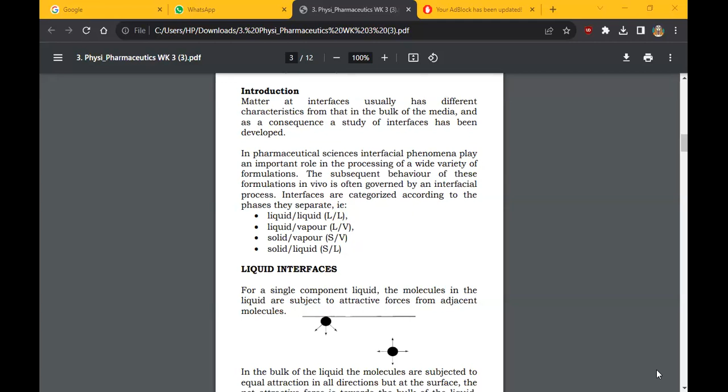For a single component liquid, that means a liquid which has one major component, the molecules are subject to attractive forces from adjacent molecules. Let me use water as an example. Water is a single component liquid, so the molecules within water are subjected to attractive forces from the molecules next to each other.

In the bulk of the liquid, the molecules are subjected to equal attraction in all directions. This is what I mean. But at the surface, which is over here, the net attractive force is inward. This net inward attraction reduces the number of molecules at the surface. So within the bulk the forces will be equal, but at the surface the attractive forces go downwards.

This results in different characteristics at the surface from the bulk, which gives rise to surface tension and surface free energy. Equal forces in the bulk keep the molecules at equal distances, while at the surface the forces move the water molecules downwards. That's what gives rise to surface tension.

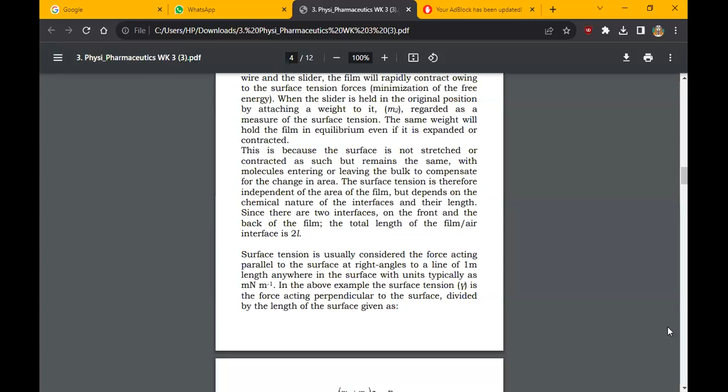Surface tension is usually considered as the force acting parallel to the surface at right angles to a line of 1 meter length anywhere in the surface. This is a very long definition. I think it's MCQs, so I'm not sure I want to focus on definitions.

In the example given above, the surface tension is annotated by this strange looking Y. So it's the force acting perpendicular to the surface. Perpendicular, from primary school we know it's 90 degrees. So the formula is this one.

So I went to the internet. Let me give you first the definition I found for surface tension on the internet. Surface tension is the property of the surface of a liquid that allows it to resist an external change due to the cohesive nature of its molecules.

So basically, let's go back to water. Water has cohesive molecules. So the stronger the cohesive molecules of water are, the more it can resist external change, which means the surface can't be broken easily. Ideally, that's what surface tension means. Like the surface of the liquid doesn't allow it to be moved or to go inward, to contract or expand, because the molecules within the bulk are stronger.

So ideally, the primary formula I'm getting for surface tension on the internet was Y equals F over 2L. F is the force, obviously, and 2L is what I've given as the length of the two interfaces. So this is also shown in this formula.

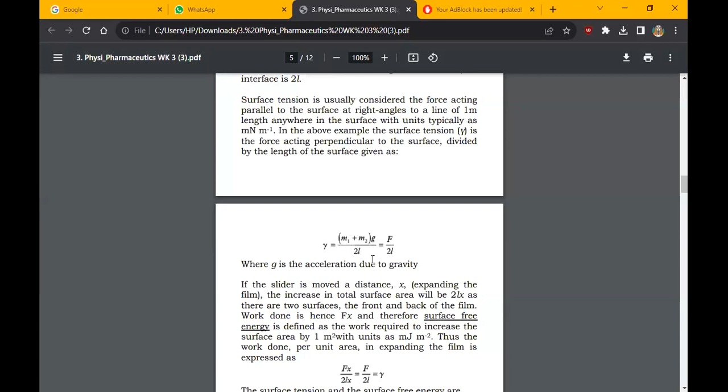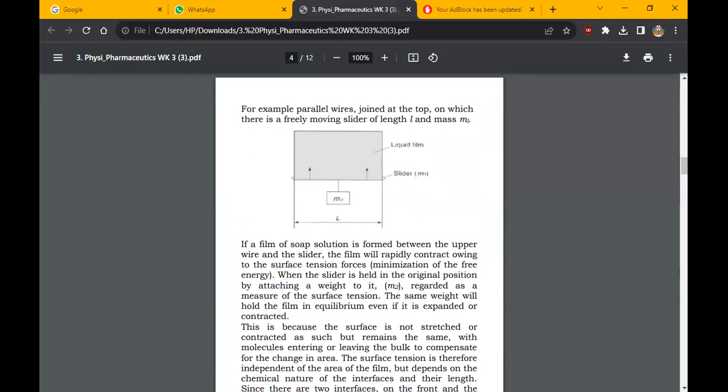So per the diagram above, there's mass 1, which is the slider itself. It has its own weight, which exerts a force. Then mass 2 is the weight that is put on the slider to keep it stationary, so that it doesn't expand or contract. And then into brackets, G over 2L, where 2L is the length of the two interfaces.

So surface tension, if you are calculating using that diagram, you're going to input this: surface tension equals mass 1 plus mass 2, multiplied by G, in grams, over 2L, which is also equal to F over 2L. So if in a formula you're given different values, you're able to equate it to this formula.

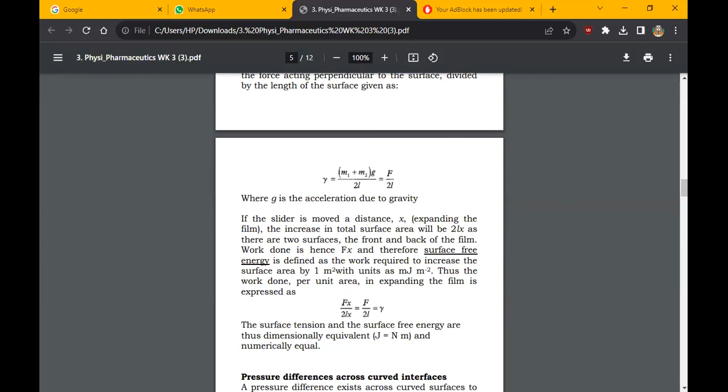So G is the acceleration due to gravity. I don't know the acceleration due to gravity value right now. Can anyone remind me? Was it 9.8? I'm not sure. If anyone knows, you can inform us or write in the chat.

So if the slider is moved a distance of X, expanding the film, the increase in total surface area will be 2Lx, as there are two surfaces, the front and the back of the film. This is just me explaining why there is 2L.

Work done is hence Fx, and therefore surface free energy is defined as the work required to increase the surface area by 1 meter squared, with its unit. It's such a long explanation, I don't think it's important, but yeah.

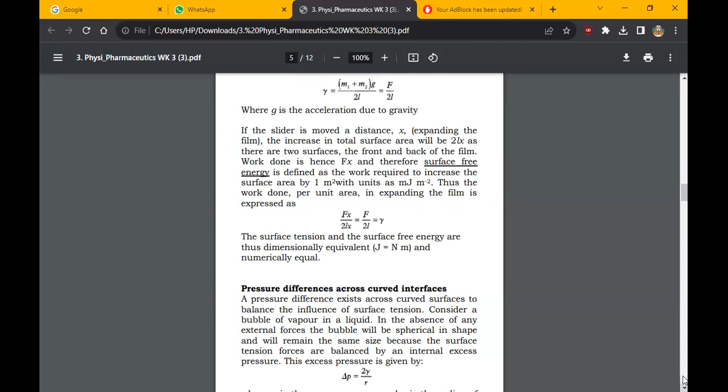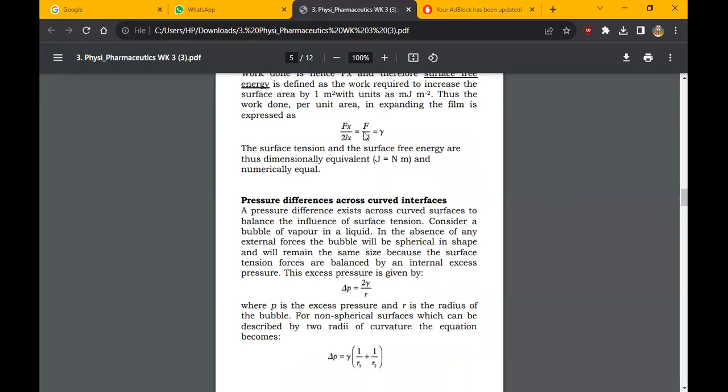I think that formula is just trying to equate surface tension and surface free energy, that whole big explanation. Because ideally F is the force exerted, 2L is the length between the two interfaces. So if the work done is defined by X, you multiply the original formula, surface tension equals F over 2L, by X over X. So you have Fx over 2Lx equals F over 2L, which is also equal to the surface tension.

So this is the surface free energy, and this is the surface tension. Per this formula, it shows they are dimensionally equivalent, which means they'll probably be equal. They should be equal when you do your calculations. So yeah.

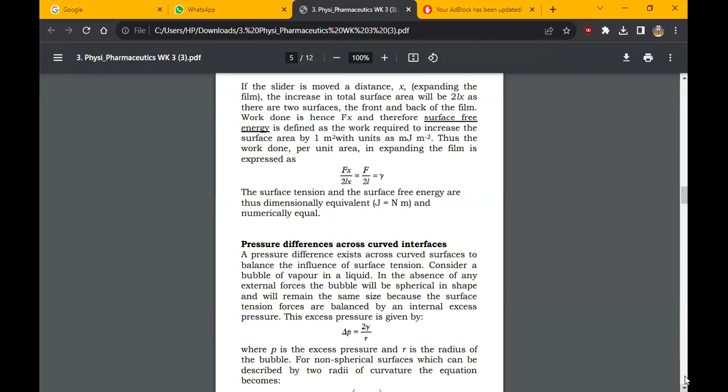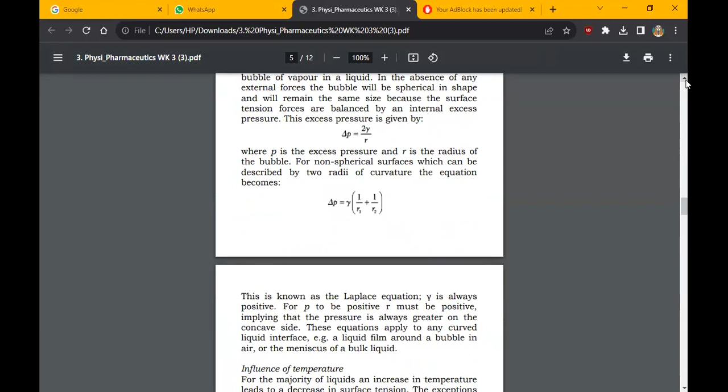So thereafter, let me take you to pressure difference across curved interfaces.

A pressure difference exists across curved surfaces to balance the influence of surface tension. Consider a bubble of vapor in a liquid, like a soap bubble, which should be spherical in shape. That's how it is normally when there's no force exerted from the top, bottom, or sides, so the bubble remains spherical and the same size because the surface tension forces are balanced by internal excess pressure. The formula for the excess pressure is change in P equals 2 times surface tension over R, where R is the radius of the bubble, since it's a sphere. That's for a spherical surface.

Are you getting this, guys? Are you with me?

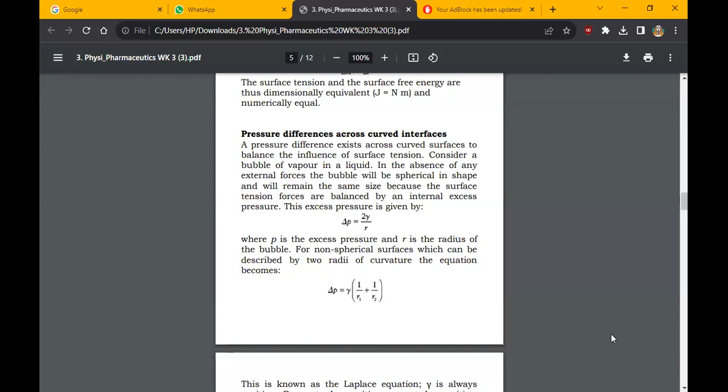Okay, so if you have a non-spherical surface, it's described by two radii of curvature. The equation becomes change in pressure equals surface tension times the bracket of 1 over R1 plus 1 over R2. So non-spherical surfaces usually have two radii, and both radii influence the excess pressure, which is why they're both included in the formula. This is known as the Laplace equation.

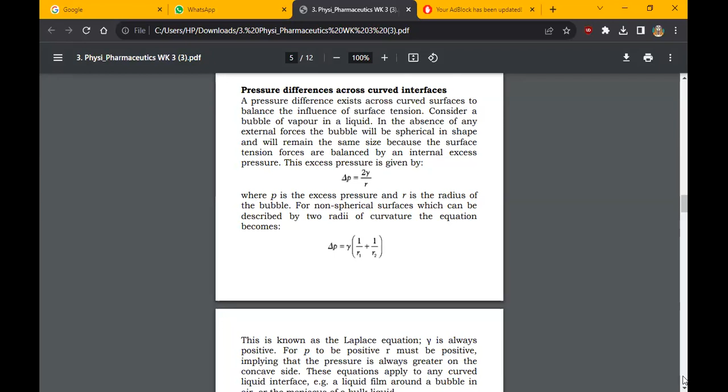That definition was rather long, so I researched something called the Laplace law. It states that the pressure inside an inflated elastic container with a curved surface, for example a bubble, is inversely proportional to the radius, as long as the surface tension is presumed to change only a little. So for your bubble, the pressure inside is inversely proportional to the radius, which is why the formula has 1 over R1 plus 1 over R2, assuming the change in pressure comes with a change in surface tension. That is the Laplace law.

Unfortunately, you just have to memorize it like that: the pressure inside a container with a curved surface, for example a bubble, is inversely proportional to the radius, as long as we presume the surface tension is changing a little. Even that last part you don't have to memorize — you can just remember that the pressure inside the bubble is inversely proportional to the radius.

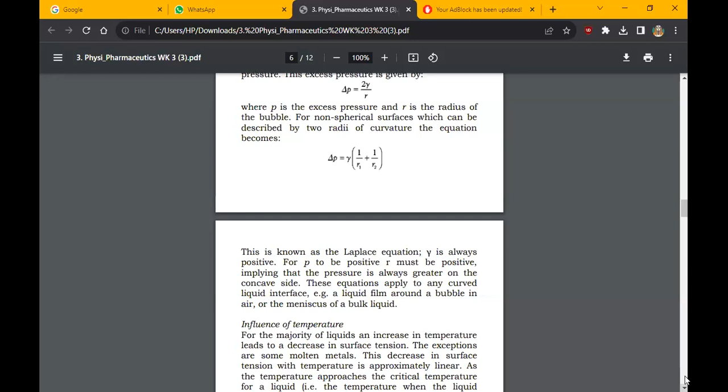After that, there's the influence of temperature on surface tension. For many liquids, an increase in temperature leads to a decrease in surface tension, and this decrease with temperature is approximately linear. So if you had a graph with an x-axis and y-axis, the line would move diagonally — a straight line, not a curve. As the temperature approaches the critical temperature for a liquid, the intermolecular cohesion forces approach zero.

I thought about this like Brownian motion — when you heat a liquid, the molecules within it move a lot more. When they move so much, the cohesion forces between the molecules are being broken down, and the molecules move about a lot. That means there's a decrease in surface tension, since surface tension depends on the cohesive forces inside the bulk as well as the forces at the surface. So if you're disturbing the bulk and the cohesive forces, the surface tension is also affected.

Think of a balloon: inside it there are molecules, and the bulk inside the balloon is air. Assume surface tension acts on the surface of the balloon, like the plastic holding the air inside. When you heat the balloon, the molecules move faster and faster, affecting the cohesive forces, and eventually the balloon bursts — meaning the surface tension has been greatly reduced.

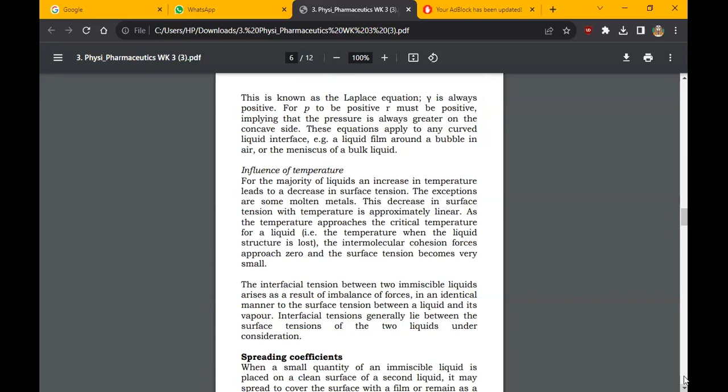So the only exceptions to this are some molten metals. I did not have time to search for such molecules.

The interfacial tension between two immiscible liquids arises as a result of imbalance of forces, in an identical manner to the surface tension between a liquid and its vapor. Interfacial tensions generally lie between the surface tensions of the two liquids under consideration.

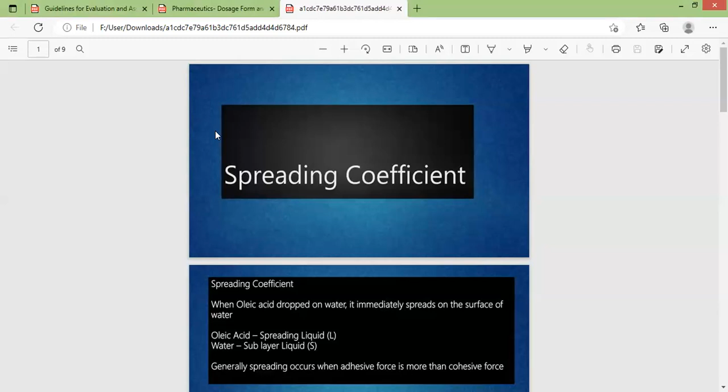Okay, sorry for the background noise. I don't know what is being built in my background.

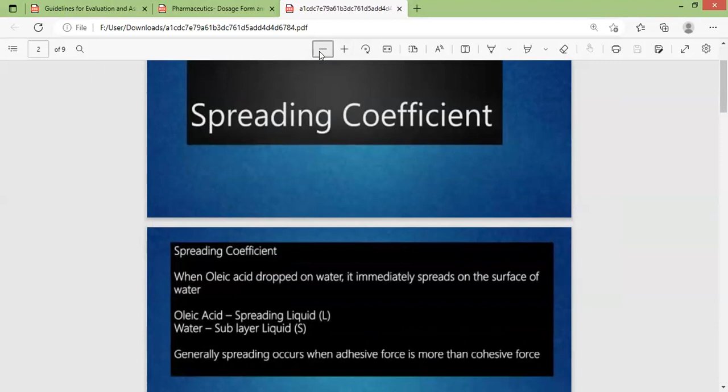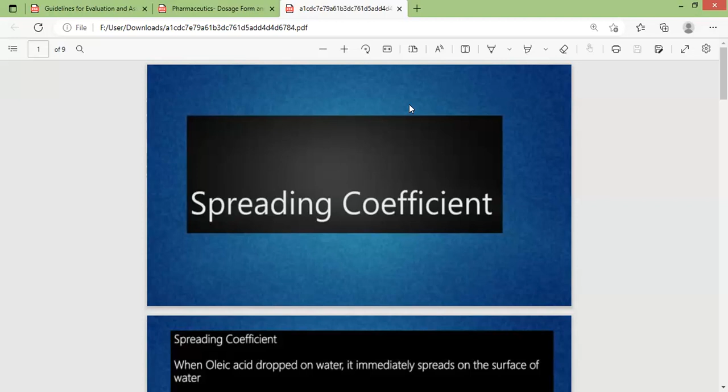So let me start by defining for you guys spreading coefficient. Basically, spreading coefficient is the measure of the wetting behavior. I'm just reading to you guys the simple definition I found: spreading coefficient is the measure of the wetting behavior of a liquid on a solid surface. So if you have a liquid which you pour onto a solid surface, how much the liquid wets the surface is the spreading coefficient. Another explanation is that the spreading coefficient is the difference between the interfacial free energy of a liquid-solid interface and the sum of the interfacial free energies of the liquid-vapor and solid-vapor interfaces.

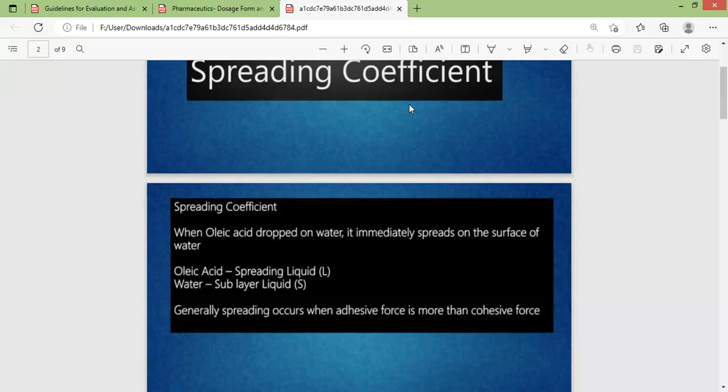From this slide share, I found it easy. So when oleic acid is dropped in water, it immediately spreads on the surface of the water. So the spreading liquid is oleic acid, and the water is the sublayer liquid, the liquid among which the oleic acid is going to have a spreading coefficient. Generally, spreading will occur when adhesive forces are more than the cohesive forces.

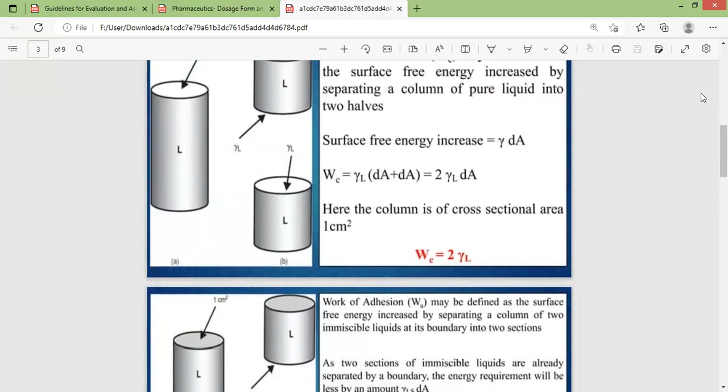From your basic science, just scroll down. Cohesive forces are the forces which are within the liquid. Adhesive forces are the forces between the liquid and the surface which it is being spread on, so adhesive forces are the forces between two different molecules. Cohesive forces, going back to the example of water - water to water molecules have cohesive forces. So cohesive forces are the forces that bring similar molecules together.

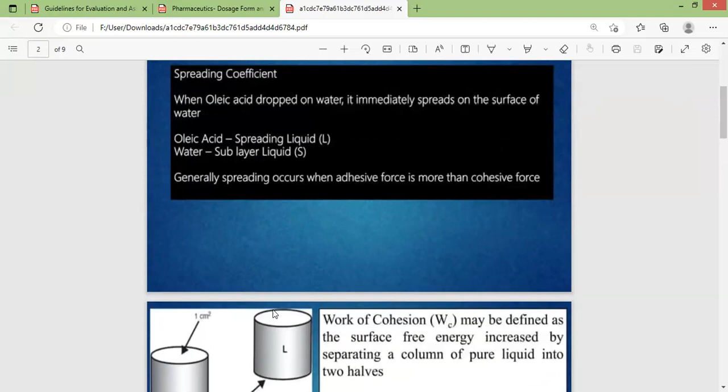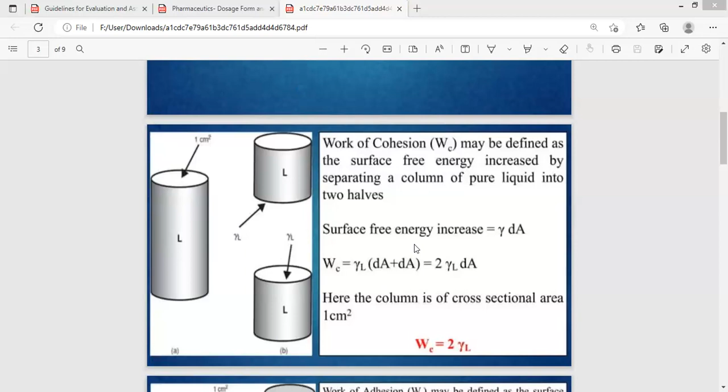Explaining it in physical pharmaceutics is a bit difficult, but I will try. So let's assume this liquid column here is the water or oleic acid. Work of cohesion may be defined as the surface free energy increase by separating a column of pure liquid into two halves. So the pure liquid, let's say, is the oleic acid - if you separate it into two halves, that is the work of cohesion.

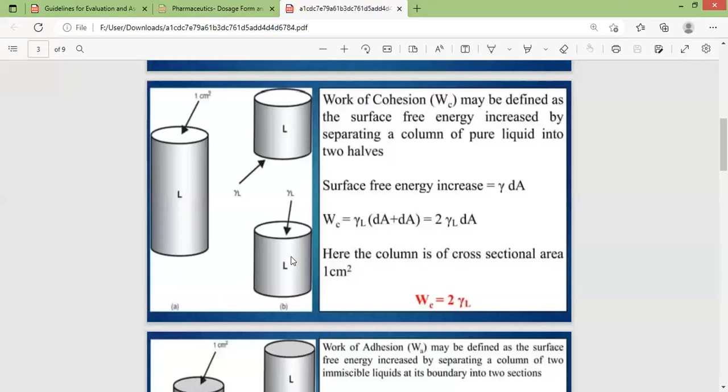Now scroll down so I can explain the work of adhesion. The work of adhesion may be defined as the surface free energy increase by separating a column of two immiscible liquids at its boundary into two sections. So the oleic acid, when spread into water - let's assume L is the oleic acid, S is water, and they're immiscible - when you separate them, that is the work of adhesion. So the first immiscible liquid will be the oleic acid, which is the L at the top, and then the S would be the water. That is the basic definition of the work of adhesion and the work of cohesion.

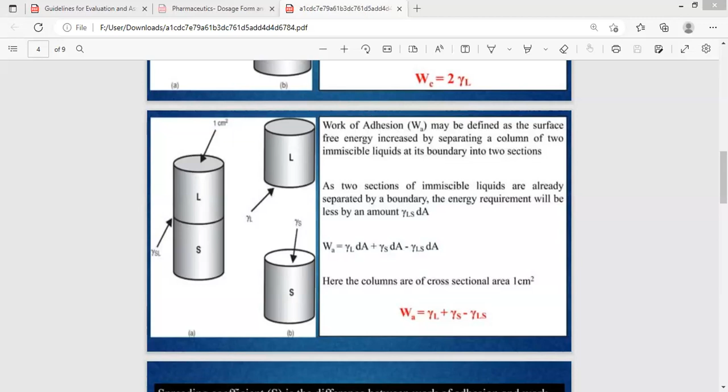So where the work of adhesion is stronger than the work of cohesion is where you're going to have the spreading coefficient.

So the spreading coefficient is the difference between work of adhesion and work of cohesion. And this long formula is what explains that. So work of adhesion, WA, minus work of cohesion, WC, is equal to surface tension L plus

surface tension S minus γLS, where L would be the oleic acid, S would be the water, and γLS will be the interfacial tension between the oleic acid and the water, minus 2 surface tension L, because again, there's two interfaces. It's such a long formula, but it's written over there. It's simplified. So what I was saying, keep scrolling.

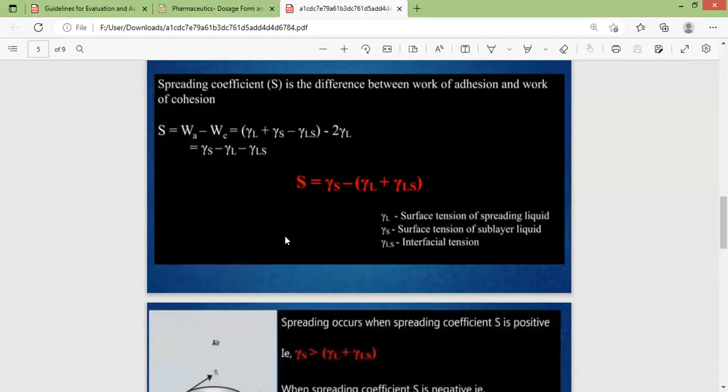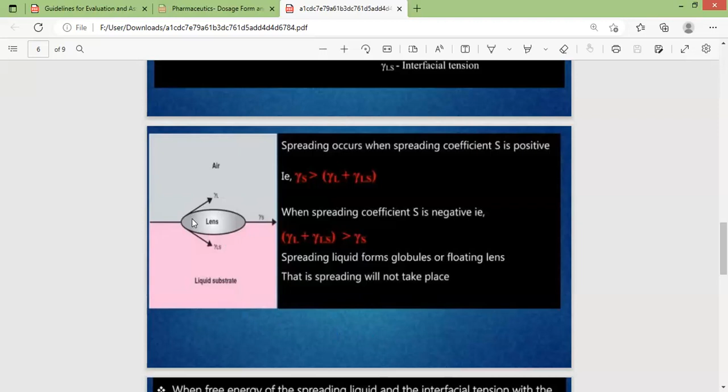The spreading occurs when the spreading coefficient S is positive. Where the spreading coefficient is negative, it means the spreading liquid will form globules or floating lenses. This means the liquid, in this case the oleic acid, which we put on top of the water, the cohesive forces were stronger than the adhesive forces, which means the spheres were not interrupted, so they settle on top of the liquid. Like now you'll see the bubbles forming because its integrity has not been affected.

But where the coefficient is positive, it means the adhesive forces overpowered the cohesive forces, which means they will mix a little bit. Okay, then scroll some more.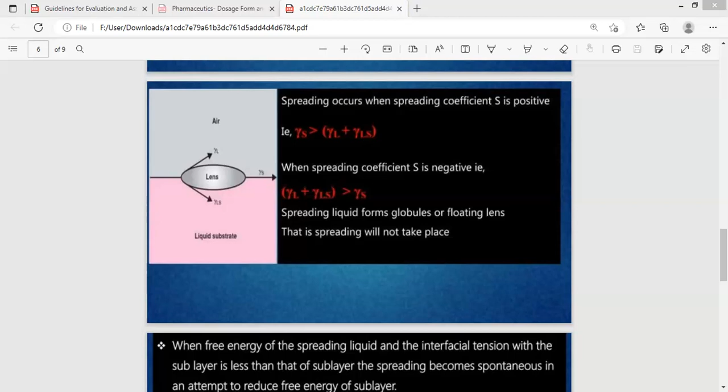When free energy of the spreading liquid and the interfacial tension with the sublayer is less than that of the sublayer, the spreading becomes spontaneous in an attempt to reduce the free energy of the sublayer. There may be saturation of the liquid with the other, and there may be change in the surface tension of the sublayer liquid. So basically, if, for example, you spread the oleic acid over the water, if at first the adhesive forces overpower the cohesive forces, then there's gonna be spreading, yeah?

But assume the water has a limited capacity, let's say the oleic acid is 10 and the water is at 5. So when 5 molecules of oleic acid combine with 5 molecules of water, the water becomes saturated. So at first the spreading coefficient was positive, and then it becomes negative after saturation, which means the spreading liquid will coalesce and form a lens on the surface of the sublayer.

Are you getting? Are you guys getting? Is it making sense? Yes. Yeah, it's making sense. Okay.

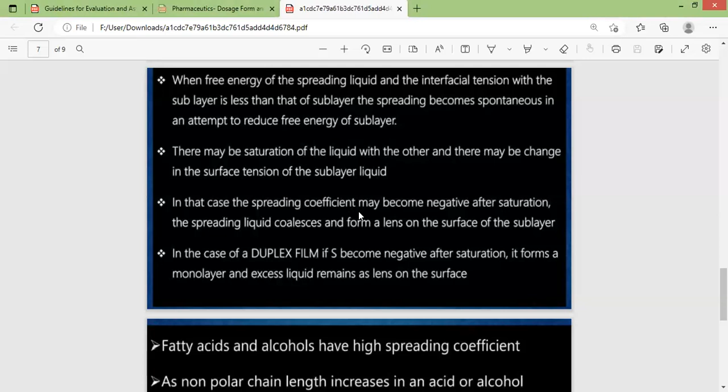So in the case of a duplex film, if S becomes negative after saturation, it forms a monolayer and excess liquid remains as a lens on the surface. So basically there's gonna be a bit of spreading and then there's still gonna be a bit of the liquid that retains its integrity, in a lens shape. So scroll a bit lower.

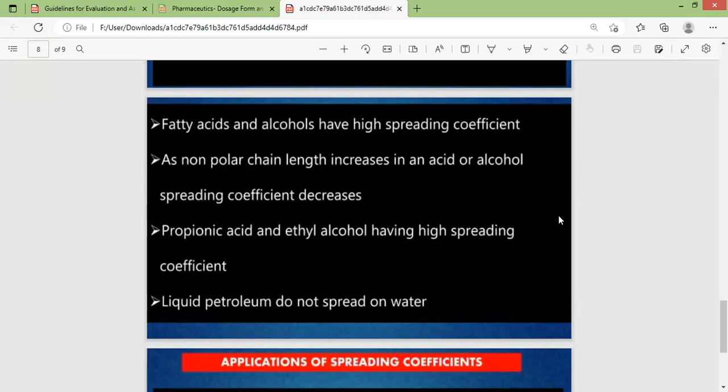Fatty acids and alcohols have a high spreading coefficient. As the non-polar chain length increases in an acid or alcohol, the spreading coefficient will decrease. This is what we are talking about. It starts decreasing and then it becomes saturated. Propionic acid and ethyl alcohol have high spreading coefficients, which means the adhesive forces will overpower the cohesive forces. And liquid petroleum does not spread on water, which means it has very strong cohesive forces.

So these are the applications of spreading coefficients: absorption of medicaments from creams and lotions, stabilization of emulsions, and coating of tablets. Yeah.

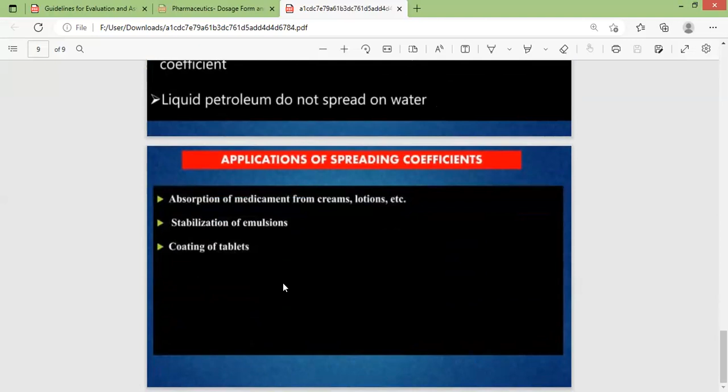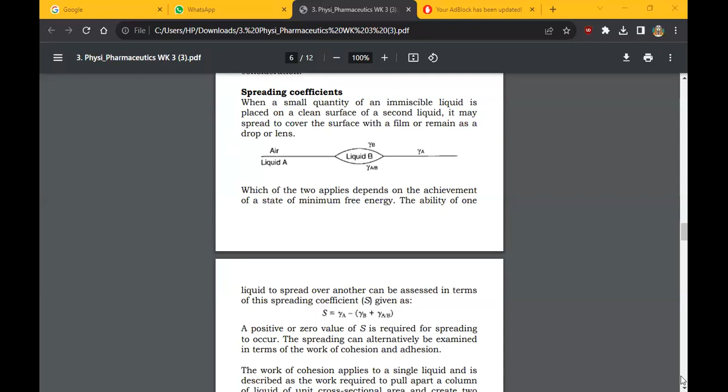You can stop sharing so that I can go back to sharing the slides. You can see. Can you guys see? Yeah.

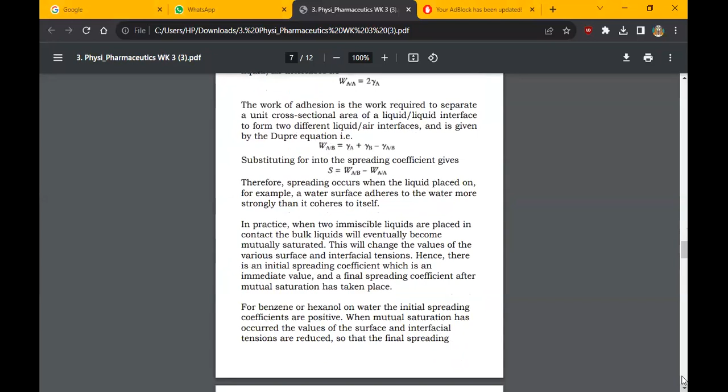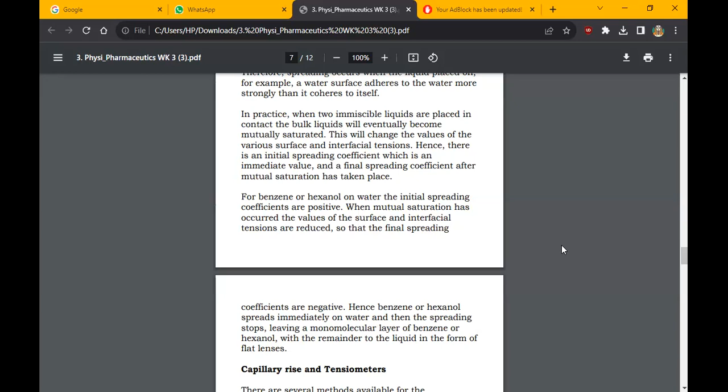Okay, so basically that presentation was just explaining all of this in simpler terms. In practice, when two immiscible liquids are placed in contact, the bulk liquids will eventually become saturated. This will change the values of the various surface and interfacial tensions. So there's an initial spreading coefficient, which is an immediate value, and a final spreading coefficient after saturation has taken place. That's what I meant.

So examples of things which undergo that are benzene and hexanol on water. There's initial spreading because the coefficients are positive, and then when saturation has occurred, there is gonna be a negative spreading coefficient. That means it's gonna spread immediately, and then after it stops, it's gonna leave a monomolecular layer of benzene.

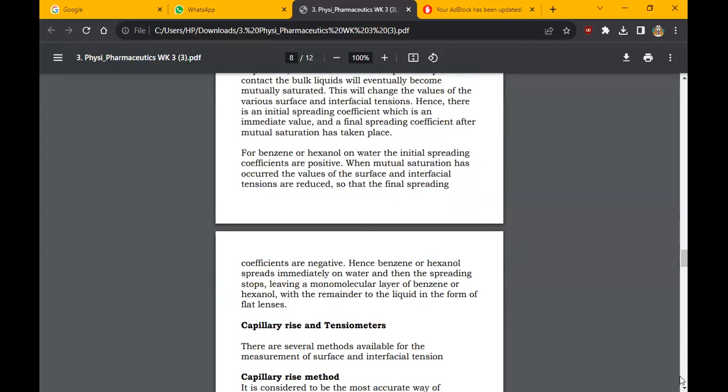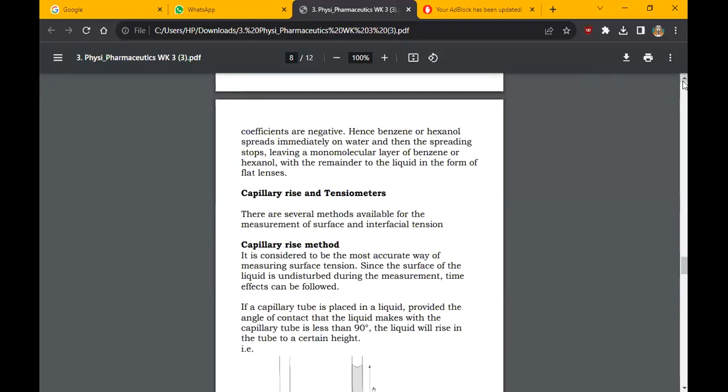So capillary rise and tensiometers. So we've reached... Carol, yeah. Before you continue, when you say they become saturated, what do they become saturated with? Each other, like the benzene becomes saturated with water and water with benzene? Yeah, because it's a mutual saturation. Oh, okay, thank you. Yeah, so both of them have been saturated, so they can't absorb each other.

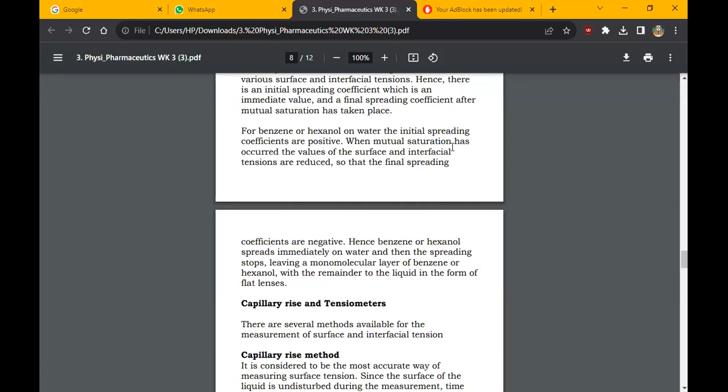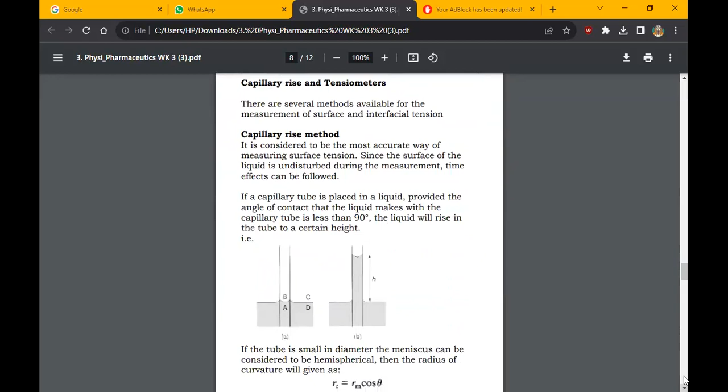So it means now for both of the liquids, the cohesive forces now become stronger than the adhesive forces. So then there's gonna be that initial layer that is there, and then there's also gonna be formation of lenses, flat lenses. Is that okay? Yeah. So capillary rise and tensiometers. These are ways to measure surface and interfacial tension.

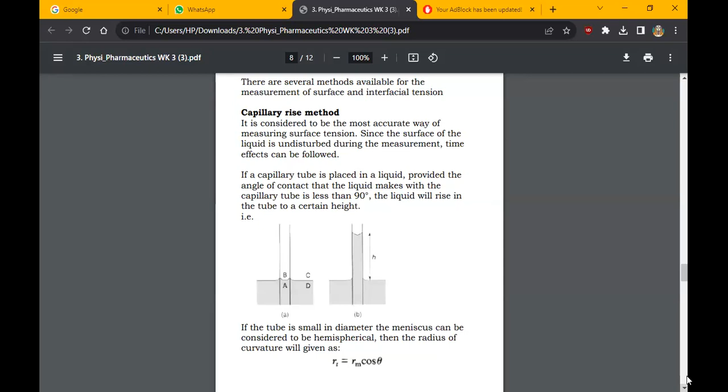So the first one is the capillary rise method. Usually it's considered to be the most accurate way to measure surface tension. Since the surface of the liquid is undisturbed during the measurement, the time effects can also be followed. Capillary tubes, I think we've seen them in the labs. They're really tiny. So I'm assuming if you put it through a liquid, it does not interrupt the surface tension.

So the capillary tube is placed in a liquid, provided the angle of contact is less than 90 degrees. It's a right angle. So if you put it at the correct angle, the liquid would rise in the tube to a certain height. So this was the original one, and then the capillary tube was inserted. After you inserted it into the liquid, it moves to a certain height.

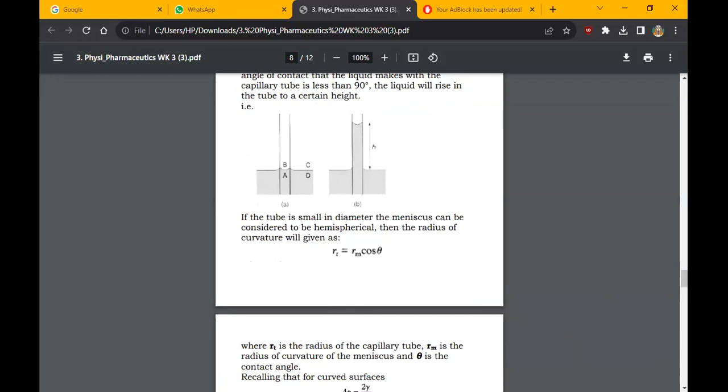So if the tube is small in diameter, then the meniscus can be considered to be hemispherical. Hemispherical is like this shape over here, like a slight curve. So then the radius of the curvature will be given as rt = rm cos θ. θ is the contact angle. And we've said the contact angle ideally should be what? Should be 90 degrees. So rt is the radius of the capillary tube.

rm is the radius of the curvature of the meniscus. So here is your capillary tube. rt is the radius here. rm is the radius for this meniscus we're talking about. And this is the contact angle, assuming it's the one that is over here. Should be 90 degrees ideally.

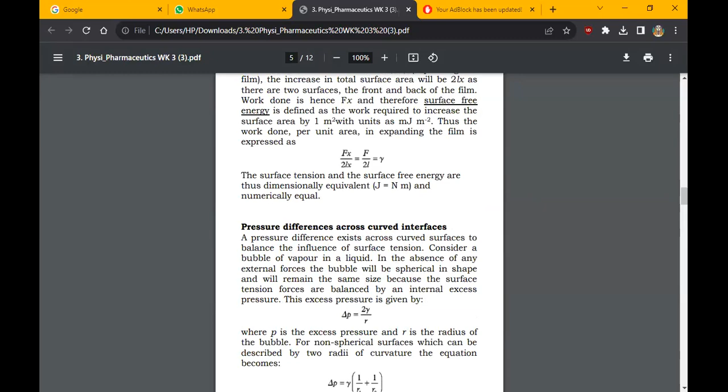So recalling that for curved surfaces, there's this formula I gave you up here, where I said the change in pressure for curved interfaces is equal to 2 times surface tension over the radius. So when you recall that, for this system the change in pressure is equal to 2γ cos θ, where θ is the angle at which the capillary tube entered the liquid, over r. So this is the pressure difference between atmospheric and that immediately below the meniscus, the difference between here and this one immediately below the meniscus.

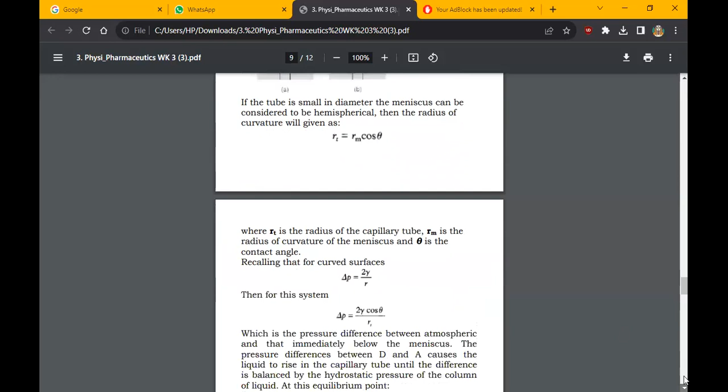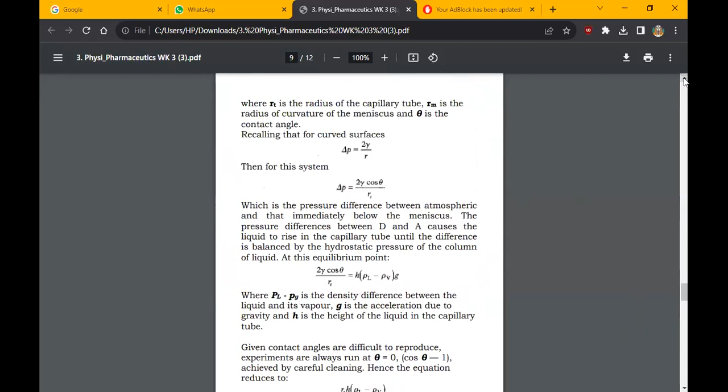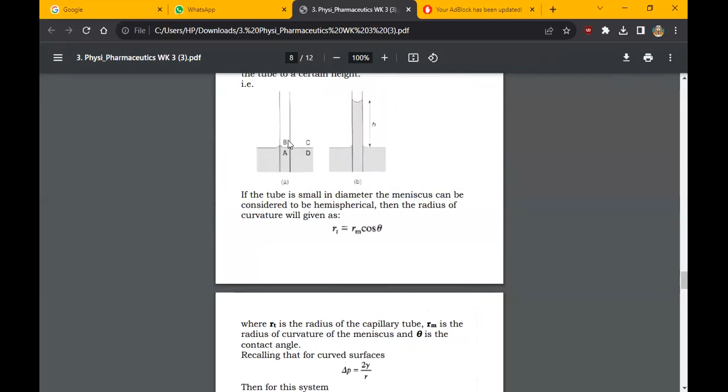Okay, so the pressure difference between D and A causes the liquid to rise in the capillary tube until the difference is balanced by the hydrostatic pressure of the column of liquid. So let's go back to this image. There's gonna be a difference between this A and D, and that's what is gonna cause the liquid to rise up here until we reach a balance.

So at this equilibrium point, remember we have this formula first, 2γ cos θ over r. This is equal to h(ρL − ρV)g. h is the height of the liquid inside the capillary tube. ρL − ρV is the density difference between the liquid and its vapor, and g is the acceleration due to gravity.

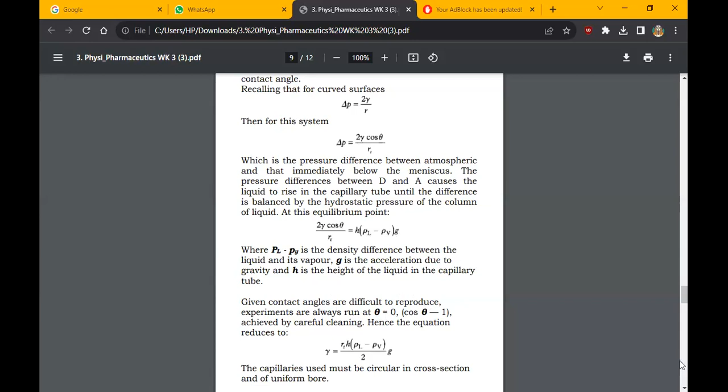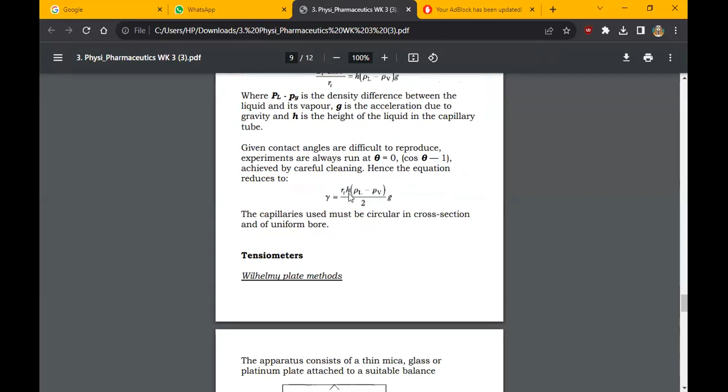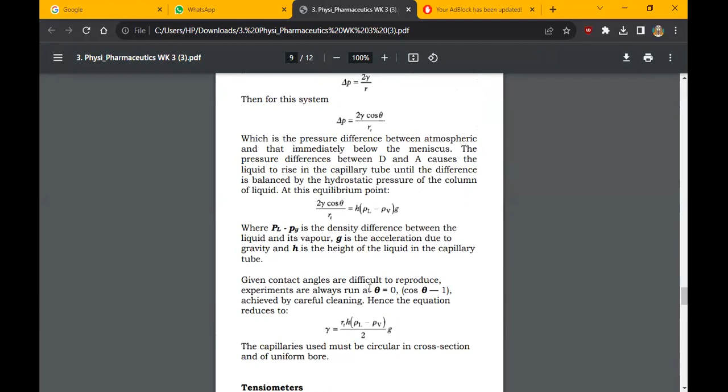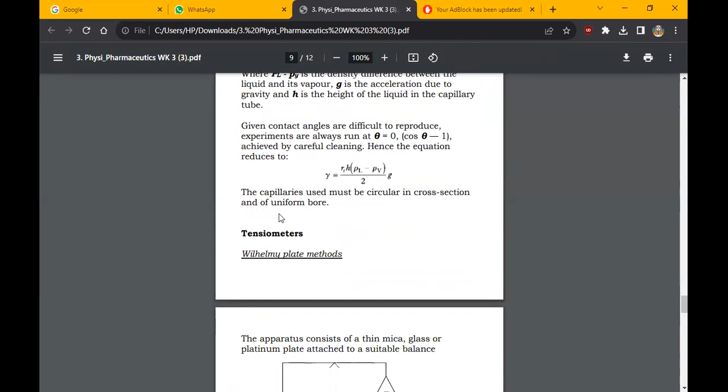So given contact angles are difficult to reproduce, experiments are always run at zero. The contact angle is equal to zero, or cos θ equal to 1, achieved by careful cleaning. Hence, the equation will reduce to γ = rhΔρg/2. This is a very long formula, but all this to say this formula leads to this formula, which derives this formula, which leads to this formula. Hopefully there is no calculation in the board exam. The capillaries used must be circular in cross section and of uniform bore. So yeah, that is one of the main ways to measure surface tension.

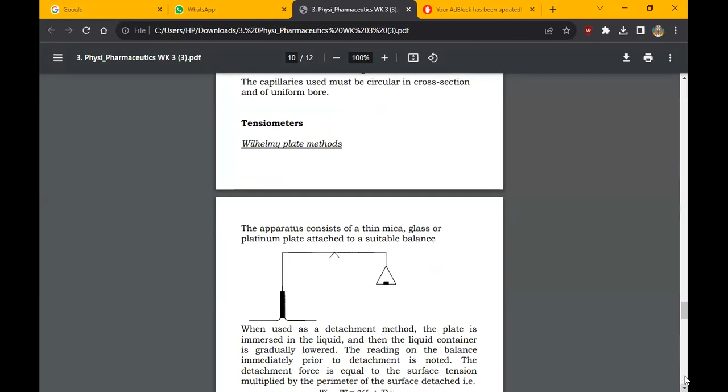And then another one would be to use tensiometers. They're also called Wilhelmy plate methods. These apparatus consist of a thin mica, glass, or platinum plate attached to a suitable balance. So this is it. I think this is the balance, and this is the thin mica. When used as a detachment method, the plate is immersed in the liquid, and then the liquid container is gradually lowered. The reading on the balance immediately prior to detachment is noted.

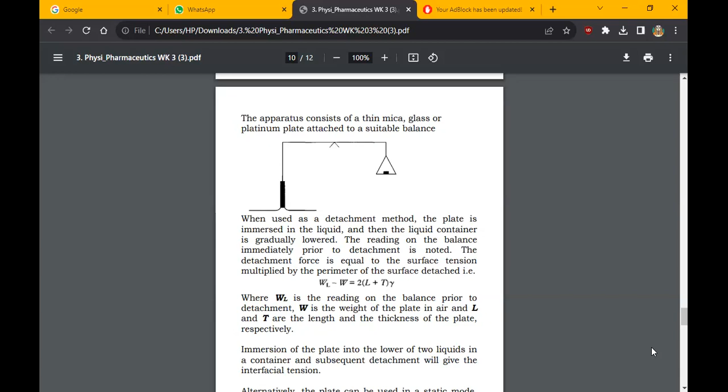So the detachment force is equal to the surface tension multiplied by the perimeter of the surface detached. That is quite a mouthful. So when using the detachment method, the plate is gonna be immersed into the liquid, and then the liquid container is gradually lowered. Thing is though, I don't know where the plate is, because I know this is the weight.

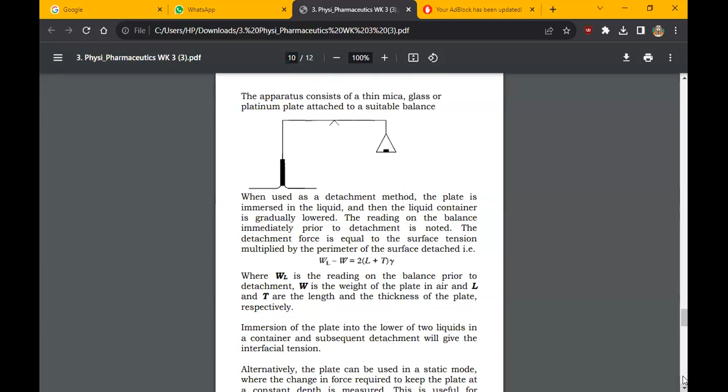Or is this the weight? I'm not sure about this one, guys. In case anyone knows about it, can explain to me. Because I'm assuming this is the plate and then this would be the balance. So when you immerse it in the liquid and then the liquid container is gradually lowered, the reading on the balance immediately prior to detachment is noted. I'm not sure about this one. Sorry.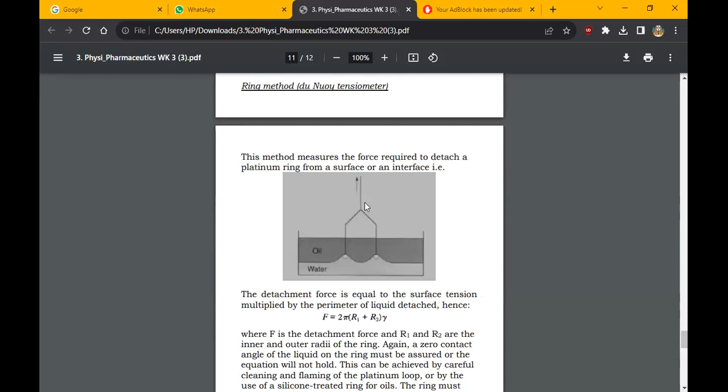So there's the ring method. This method measures the force required to detach a platinum ring from the surface or an interface. For example, here it is. So the detachment force is equal to the surface tension multiplied by the perimeter of the liquid detached. So you just measure the force required to detach a platinum ring from a surface or the interface.

So basically you're supposed to measure the amount of liquid that is detached and then you will multiply it by the surface tension. So F is equal to 2π(R1 + R2) multiplied by the surface tension. F is the detachment force. R1 and R2 are the inner and the outer radius of the ring. And then zero contact angle of the liquid on the ring must be assured or the equation will not hold.

This can be achieved by careful cleaning and flaming of the platinum loop or by the use of a silicone treated ring for oils. Basically, you must clean it properly and make sure that the angle at which it touches the surface of the liquid is zero. Otherwise, if it's a bit dirty, then it's gonna change the angle, and that's gonna bring a difference in your calculation.

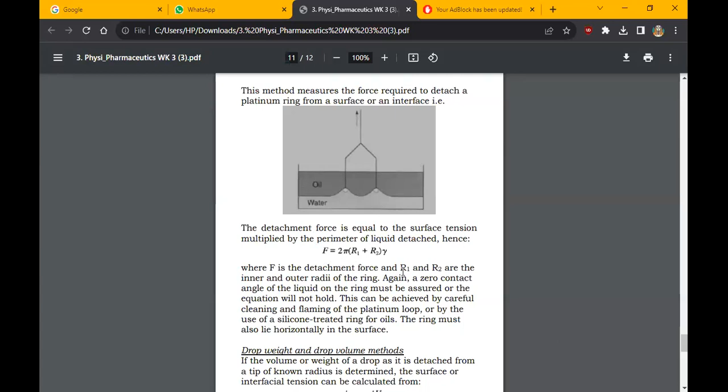Okay. So drop weight and drop volume methods. If the volume or weight of a drop as it is detached from a tip of known radius is determined, the surface or interfacial tension can be calculated using this formula. I think this is the one that we did in the lab. I'm not sure if we went to the lab for this, but I think this is the one.

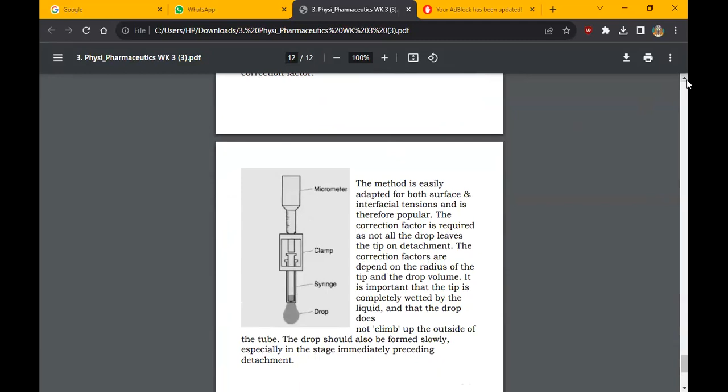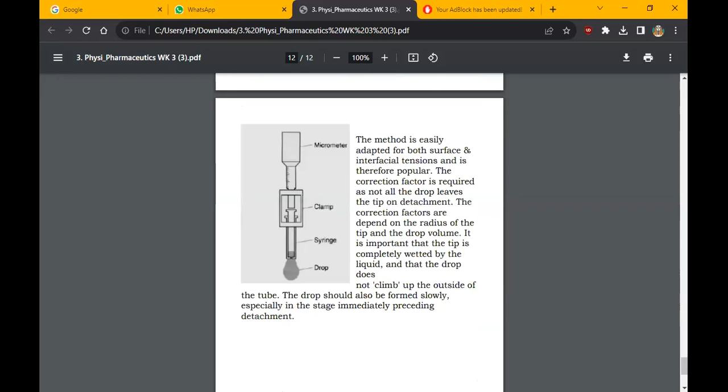So basically, if you know the volume or weight of a drop as it's detached from the tip, so here is the syringe, here is the drop. If you know the weight and the volume of this drop, then you can use this methodology to calculate your surface tension. M is the mass of the drop. V is the volume of the drop. So we must know the mass and the volume as well. And then ρ is the density of the liquid whose surface tension you're measuring. R is the radius of the tip. G is the acceleration due to gravity. And this thing is the correction factor.

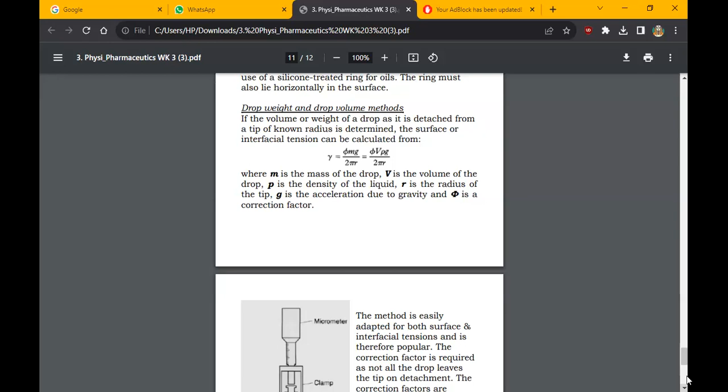So this method is easily adapted to both surface and interfacial tensions and is therefore popular. The correction factor is required as not all the drop leaves the tip on detachment. That means sometimes when you press the syringe, some molecules of the drop might remain, so you might have a higher value or a lower value. That's why you need the correction factor. But also we struggled with these calculations because it's not a very accurate way of measuring surface tension. The correction factors depend on the radius of the tip and the drop volume.

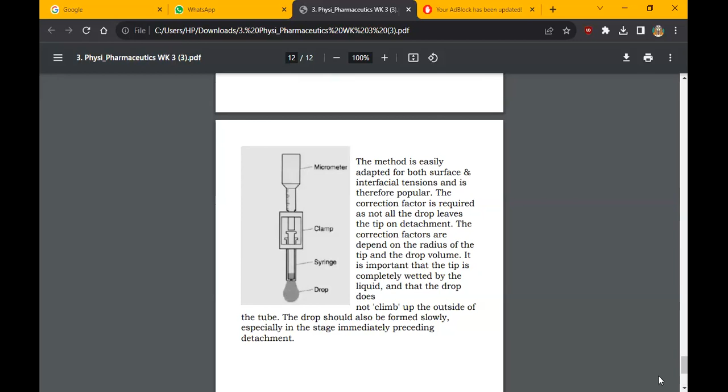It's important that the tip is completely wetted by the liquid and that the drop does not climb up outside of the tube, which means we're trying to ensure the drop doesn't go on this side, to be as accurate as possible. The drop should also be formed slowly, especially in the stage immediately preceding detachment, which means when you're pushing the syringe, you have to do it slowly and carefully to get accurate results.

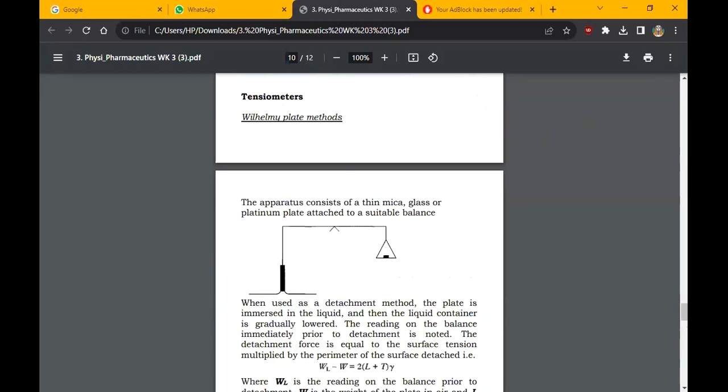So the one thing I've not been able to explain is how you use the tensiometers. But other than that, I think I am done for the first part, for the interfacial phenomenon. Any question? Any question, boys?